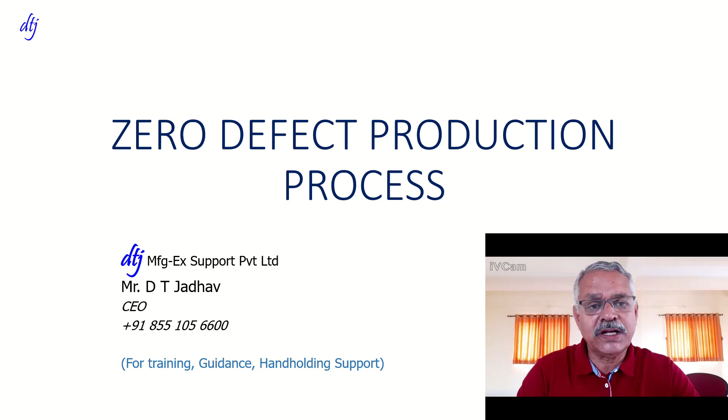So let us come back to our core subject, zero defect production process. This has become a demand of the situation because every company wants to grow, but how will that growth happen? We are in the supply chain and our end customer is the OEM, so we have to deliver as per their schedule, and perhaps we are supplying with zero defect. The customer may be happy with on-time delivery and zero defect supply, but what about their confidence in our way of working? So we have to work for gaining their confidence in our way of working. That's why we have to adopt this zero defect production process.

Secondly, at the OEM's end, they also want their supply chain to be very lean and they are continuously monitoring our performance. They try to categorize which companies and suppliers are in the lifetime source category, and which companies are not improving their performance to satisfaction. Those companies can go into the de-risking category. Naturally, if you want to grow, you have to remain in the good book of the customer, that is, the lifetime source category.

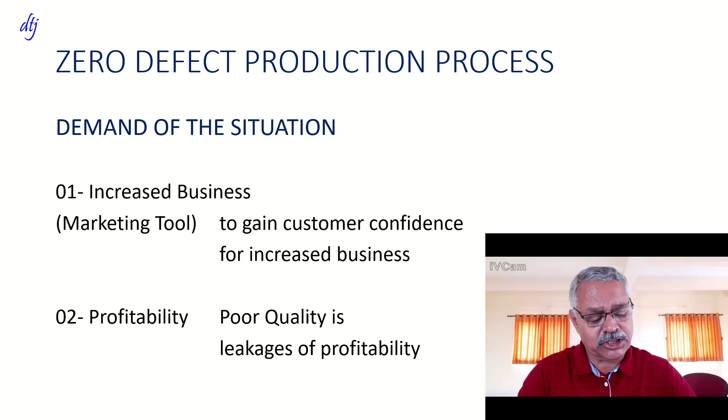Now, how to gain the customer's confidence? By way of on-time delivery with zero defect supply. But if we are doing 100% final inspection and sorting out defective pieces to ensure zero defect supply, then perhaps the customer will not be happy. So we have to adopt a production process which is capable of producing zero defect.

Once we adopt this, the system to sustain that process and the culture of the shop floor people who are going to adopt the whole process will gain the customer's confidence. And naturally, with this, our cost of poor quality will be eliminated and our profitability will also be retained as per what we have targeted.

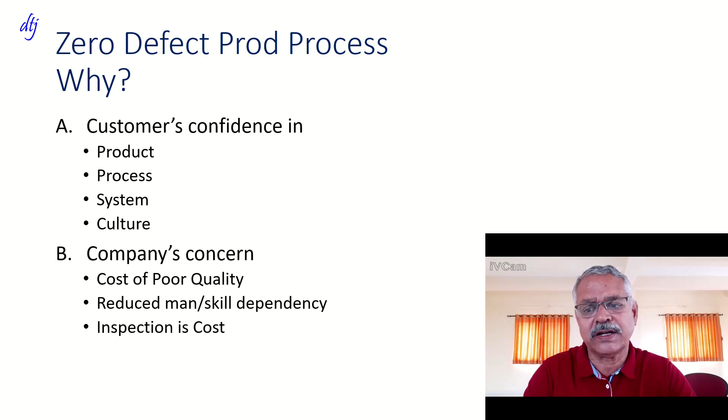Now, I have interacted with many CEOs of companies and there is always some thought process going on in their mind. They think when my engineers or designers design the production process and implement it, definitely it was for zero defect production.

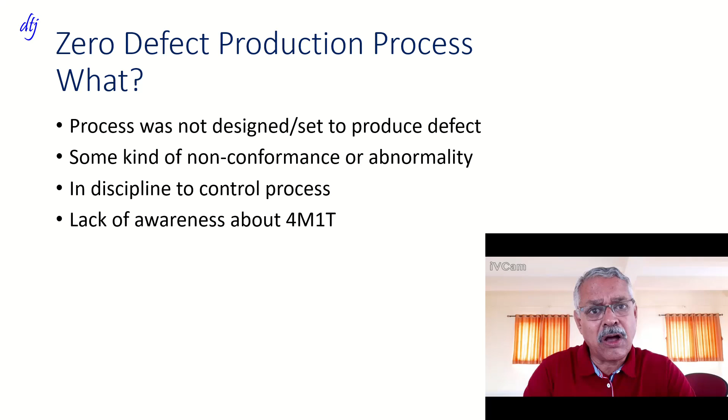But when we actually start production on the same process, some defects get generated. What does this mean? Either there is some kind of non-conformance, some kind of abnormality still live and we continue with the production, or there is some indiscipline in terms of controlling the process, or there is a lack of awareness regarding 4M1T conditions. According to me, the most sustainable cause is lack of awareness among the people operating on that process on a day-to-day basis.

Now, how to achieve this? We have to follow some steps. First, we have to form a team of frontline people in the shop floor. That team includes frontline operators actually working on the machine, maintenance fitters maintaining the machine or equipment, tool room and tool fixture maintenance fitters maintaining the tooling, line inspectors controlling the process in day-to-day working, and frontline engineers. We have to involve them in following certain activities to achieve the zero defect production process.

Over a period, we expect this team will become an autonomous team. We have talked about autonomous workforce and team in detail in the last session. Just for reference, I look at this team as autonomous because they are well educated, well trained, experienced, skilled people who will maintain 4M1T conditions of the production process, ensuring a zero defect production process. They are a self-driven team. Whenever there is some abnormality related to 4M1T, without waiting for somebody's instructions, they try to set it right to ensure the zero defect production process. So this is in short about the autonomous workforce.

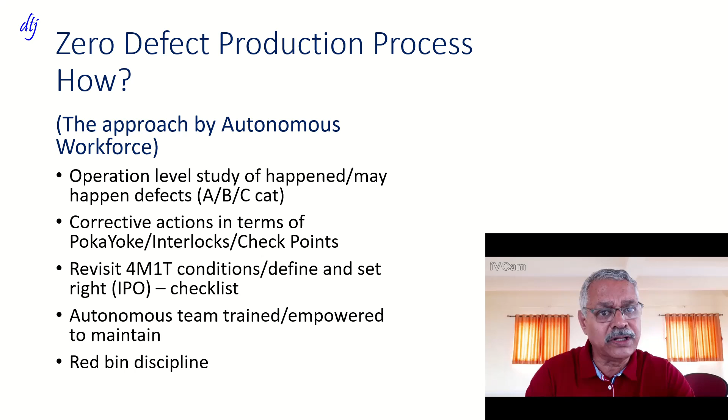The last step: if any defectives are generated during production, there has to be an operation level, machine level red bin discipline. Any non-conforming or no-good product has to be put into the red bin. At any cost, it should not go to the next operation.

Now coming back to how to define an autonomous team and autonomous workforce. If we look at the daily work management of the production operator or machine operator, apart from his technical skills, he must follow good practices like 'I do, I check.' Every product being produced in his operation or machine, he will check and ensure it's okay before passing it on to the next operation.

If he comes across any defective product, he will put it into the red bin. Secondly, 'I operate, I maintain' - in TPM we call that autonomous maintenance. He has to follow cleaning, lubrication, inspection, retightening, and highlight and fix abnormalities.

He has to increase his scope for abnormalities beyond the equipment. For all abnormalities, he should be in a position to check, and if there is an abnormality, he should either fix it himself or get it fixed with the help of a maintenance fitter, tool room fitter, or anybody else.

The third point is strict adherence to the standard operating procedure - no shortcuts, no increase in speed and feed. So, adherence to the standard operating procedure.

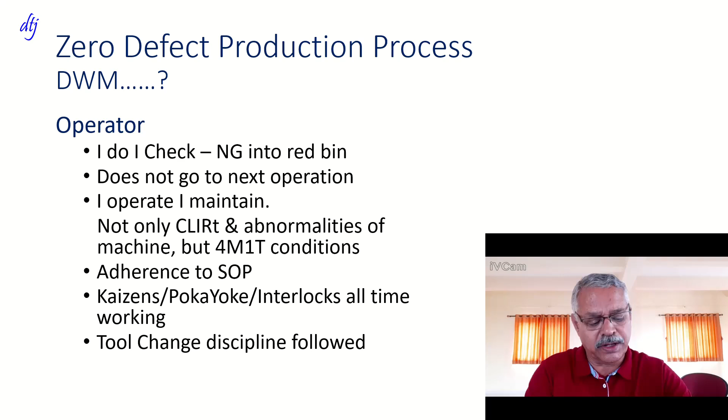Next comes the autonomous maintenance fitter or tool room fitter, tool fixture maintenance fitter. His job is to keep a close watch on abnormalities and fix them daily - he should not wait for instructions from his seniors to fix abnormalities. It should become part of his daily routine.

Then carrying out PM and TBM activity as per schedule, ensuring all kaizens, interlocks, and pokayokes are maintained live and in working condition, with a very close eye on wear and tear. Naturally, with fixtures, machines, and equipment, there will be some natural wear and tear, so these people have to keep a close watch and replace those parts before it generates a defect or breakdown.

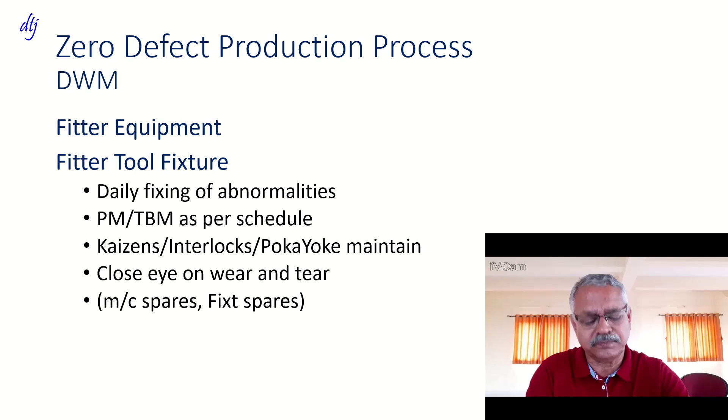Now, what is the DWM of the line inspector? He has to ensure operation level control on the defective products. He has to ensure process is followed as per the SOP. He also has to keep a close eye on abnormalities and get them fixed timely from the autonomous team members. He has to ensure that all interlock and pokayoke kaizens are working all the time, with no dead kaizens and no bypass of pokayoke and interlock.

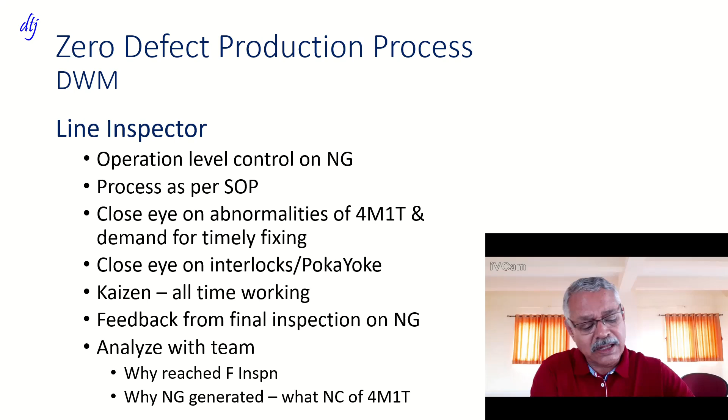Then he has to be in touch with final inspection and take the feedback on whether that person is getting 100% good jobs or any defective products on his table. Then he has to ask himself two questions: why did the defective product reach final inspection, who did not follow the red bin discipline, who did not arrest it at the operation level? And second, why did this defective piece get generated at all, what is the non-conformance related to 4M1T? Then accordingly he has to set it right. That is the DWM of the line inspector.

For the frontline engineer and supervisor, his daily work management will be ensuring operators are trained and follow daily work management, adherence to SOP, doing timely gauge, CLIRt and IPO control, 4M1T control with reference to IPO, the autonomous team fixing abnormalities on time, and all kaizens and poka-yoke interlocks in working condition all the time.

He also has to ensure zero defect supply from the receiving inspection. If some operations are done outside our company, then at receipt stage he has to ensure he gets defect-free supply from receiving inspection. Very importantly, whatever we have learned from this process should go in the form of visual controls at operation level, so that what we expect people to follow day-to-day is documented visually at the operation level. That is the job of the frontline engineer.

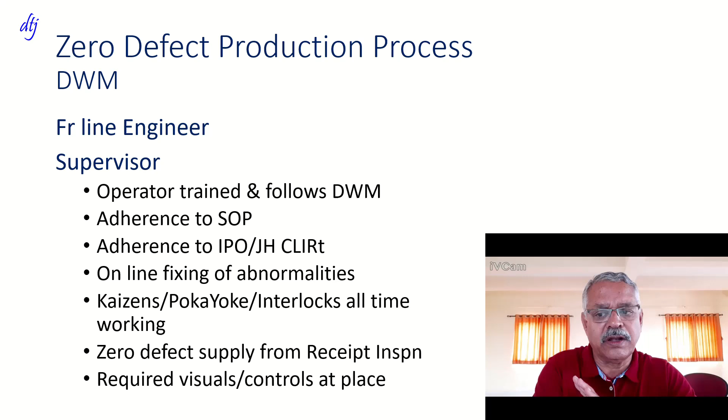I am sure if we involve our shop floor team and develop them as an autonomous workforce, and follow the steps of QA matrix, IPO and IPO-based four-M condition control, we can achieve the zero defect production objective.

Barring the possibility of defect generation from two or three causes: one, whenever power goes off and a cycle remains incomplete, that will be a defective piece. Second, at the time of setup change, tool change, or while giving the offset, one or two pieces get defective. Such defectives the operator has to arrest into the red bin. Otherwise, by following this zero defect production approach during the production process, we are in a position to produce with zero defect.

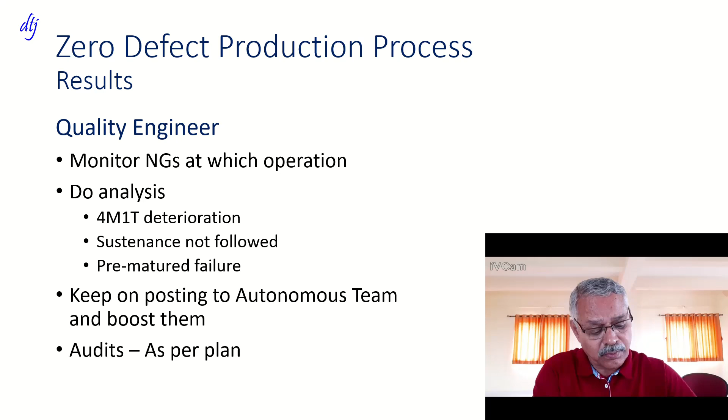Now coming back to gaining the customer's confidence. We have to demonstrate the zero defect production process approach to the customer on the shop floor. The customer expects that demonstration to happen from the frontline people. So whatever the thought process is at plant head level, whether it has percolated down to the last person in the company, the production operator, the customer will cross-check whether he knows the zero defect production process, the importance of 4M1T control, and whether he can contribute to that.

So we have to demonstrate this zero defect production approach to the customer. Then he will gain confidence that the company is not only supplying with zero defect, but also producing with a zero defect approach, and that will help us gain confidence from our customer. Ultimately we will get into his good books, becoming a lifetime source, which will help us gain more and more business from the customer.